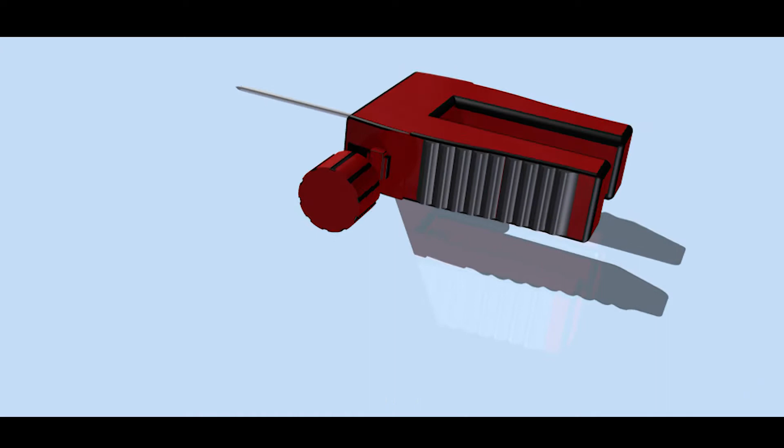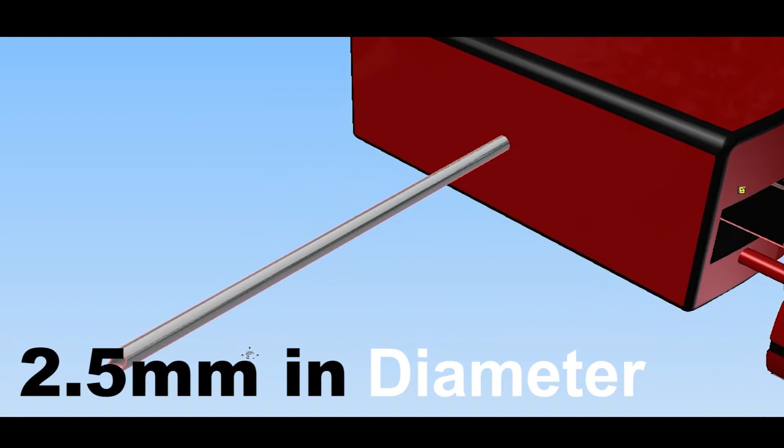The precision knob-controlled bone marrow drill is our take on what's needed to complete a bone marrow biopsy. It works in a similar way as the current line of Jamshidi bone marrow biopsy needles. The sample sizes are also larger and more precise, and this is done using a knob system installed within the drill and a slightly larger size needle gauge that's about 2.5 millimeters in diameter. Increasing the size of tissue samples can prevent the chance of a second biopsy, and that would be very painful

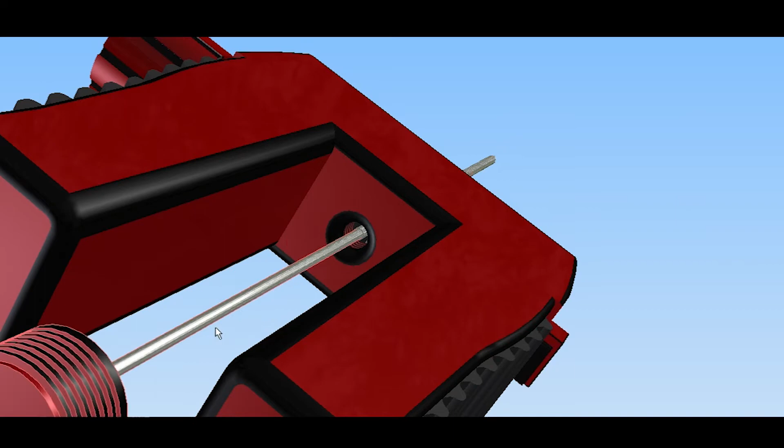and much more expensive. For cutting through the bone and making way for the needle, a triple-faced trocar-tipped rod is used. This rod gets through the bone to the marrow. It goes through the inside of the needle itself to the other end and stays in place through the use of a threaded cap. The needle bit itself is where this design differs.

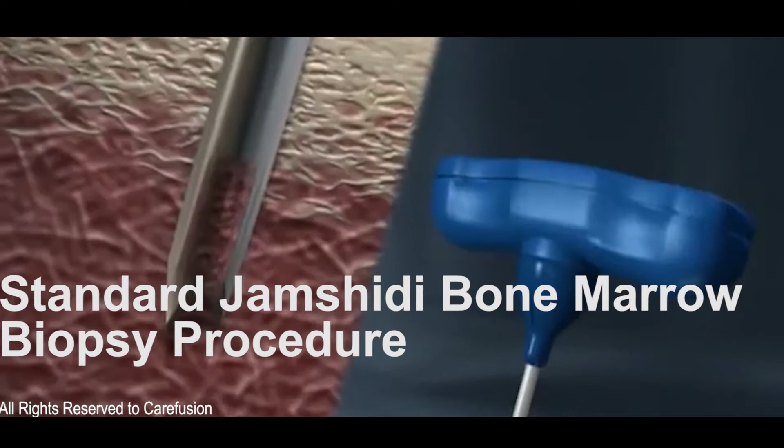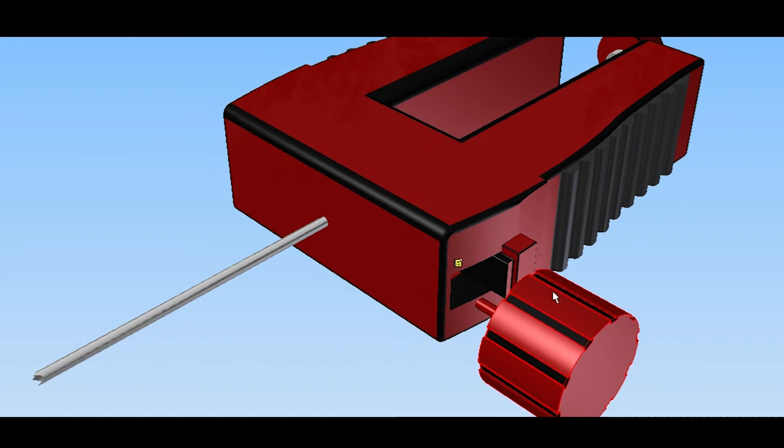Most commonly, doctors insert the needle using manual force as soon as they get past the bone itself and enter the bone marrow. They may still go very deep into the marrow. The maximum size for a sample is 4 centimeters in depth. If the needle is pushed in very deep, they'll have to carefully adjust it using manual, uncontrollable force. For an inexperienced doctor, this task may be difficult. So this design uses a gear system controlled through a knob to precisely insert the needle after manual adjustment.

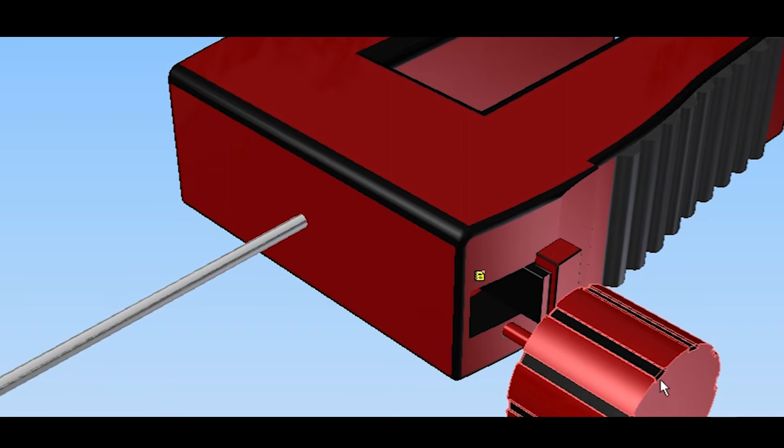Even for an experienced doctor, this task is tough since they're working with millimeters of precision, and so the knob makes things much easier. Doctors would have to remeasure the sample size with each movement of the needle into the bone marrow. Turning this knob one full rotation moves the needle forward 2 millimeters. This eliminates the need to constantly remeasure and ensure the needle hasn't penetrated the marrow too deeply, saving time.

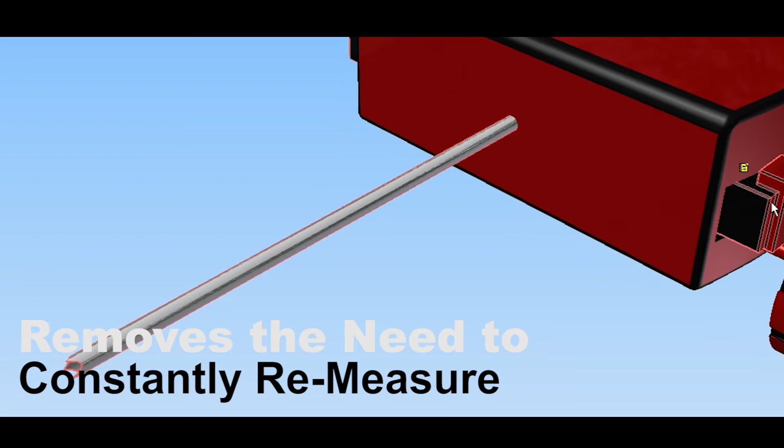If doctors can just remember this, they can turn the knob as desired after taking a quick initial measurement from the point at which the needle first entered the bone marrow. The needle can move up to 1 centimeter forward, and this leaves quite a bit of space in case the first entry is either too shallow or too deep.

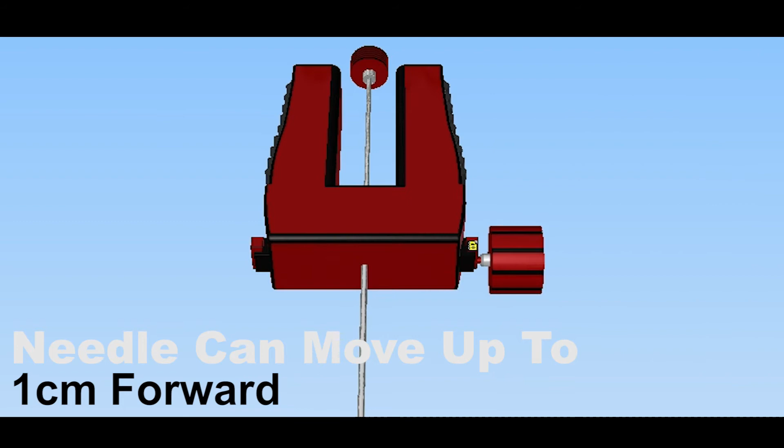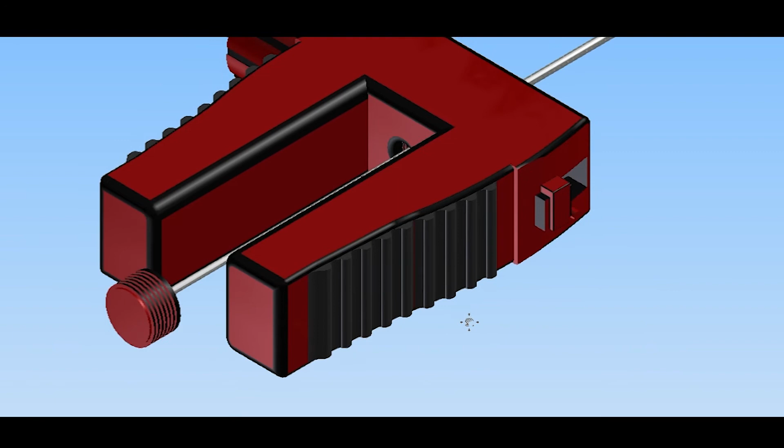This design also uses an ergonomic handle with rubber grips for support. This design allows for the doctors to get a tighter, more comfortable grip on the drill itself. The trocar-tipped rod and needle bit are made up of Type 420 surgical stainless steel, while the handle and working gears within the drill are made up of PEEK engineered plastic, and, of course, the rubber grips are made up of rubber.

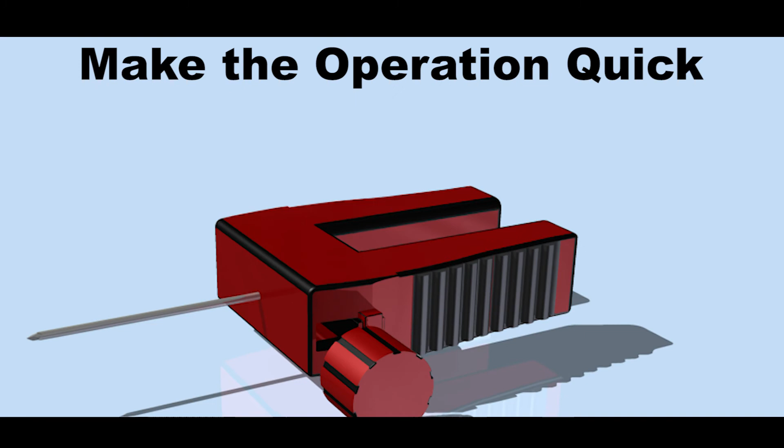So, the PKC bone marrow biopsy drill will make the operation faster and collect larger samples with surgical precision, all while the doctor can comfortably hold it. This is all done to make the operation safer for the patient and easier on the doctor.